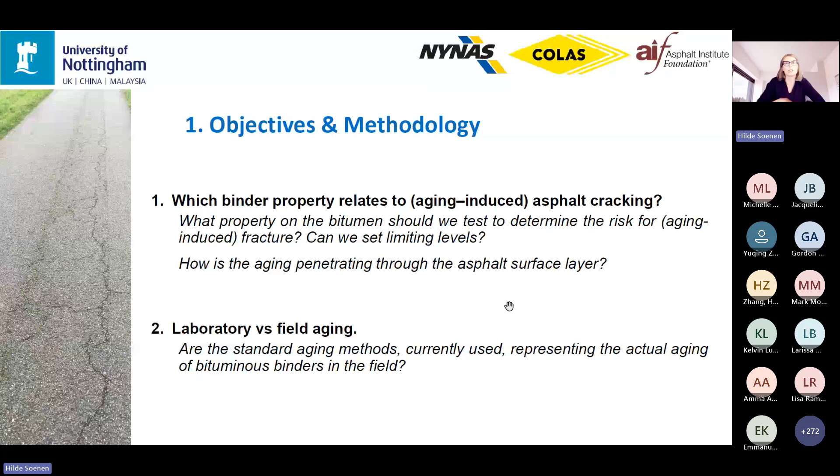Regarding the methodology, we first needed to select pavement sites, and we wanted pavements that have aging, so they needed to be at least 8 years old. We also wanted to have info on the road performance or road condition.

These two conditions are not easy, so it was not easy to select pavements, just to find pavements that were there where we could get cores from. Once we were able to get cores, we tried to take a large number of cores from the same spot, and all cores were taken from between the wheel paths because we were interested in the aging.

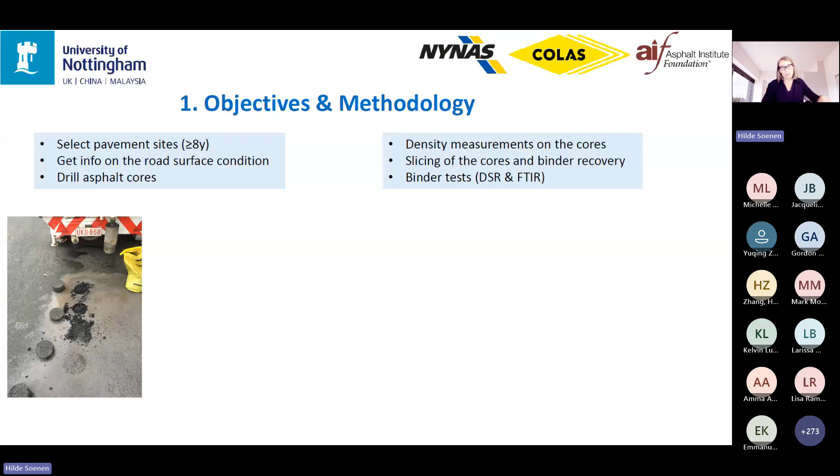Once we had enough cores, density measurements were conducted using nuclear density, which has the advantage that you get a density number every millimeter. After that, we sliced the cores.

In this case, you can see we used very thin slices. First, we put markings at 0.5 centimeter, then at 1 centimeter, and then every centimeter. And you see during the slicing, a lot of material gets lost.

So you end up with very thin slices, and we needed at least 5 cores to get enough material after the binder recovery so that we could still do some tests.

The main tests that we did were rheology and infrared spectroscopy. We also did some other tests, but those I will not discuss today. The whole procedure we followed has already been published, and at the end we will give some references where you can find these papers.

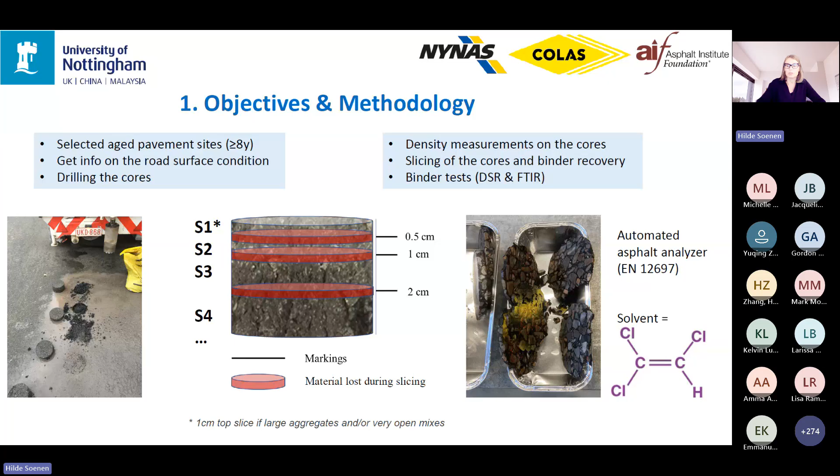Regarding the field sites we selected, in a project before this one we had already looked at a number of sites all over Europe, even one site in Morocco. During what we call the AIF project, we added 5 new sites to the project, as you can see here.

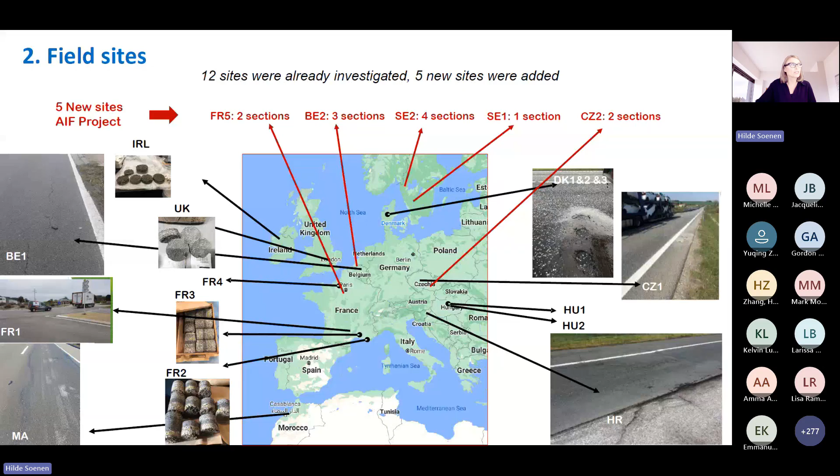I will not go into detail on all of these sites, but a few of them. For example, we had a site in France, from the highway between Paris and Lyon.

It's a very trafficked road, and there were two sections, one from 2004 and one from 2010, which you see here in the pictures. The one from 2004 was, in fact, end of life.

We also got the performance evaluation from the French road authorities, but they ended up with 3 levels, 3 severities. The older one was severity 3, and the pavement from 2010 was severity 2 in that system.

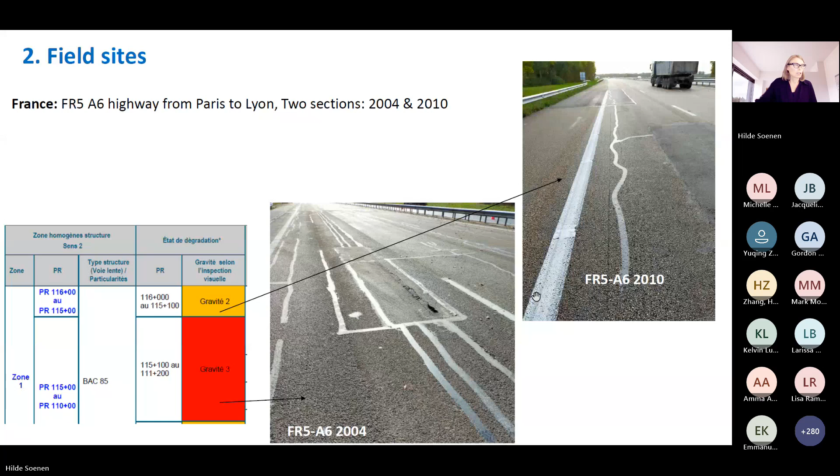Then we had a pavement in Belgium, a local road constructed in 2009. This was a test site for warm mix. We had a warm mix section based on zeolites, replacing part of the filler with a zeolite.

Then we had a hot mix reference section, and again a warm mix section based on a wax modified binder. Unfortunately, for this last section, we could not recover the wax modified binder, so it was not included.

But the zeolite section we could split into 2, because the first part was really suffering from raveling. You already see it has been repatched, so we took cores in between these maintenance areas.

Then we had a second part where we could also take cores, which had mainly raveling, as you can see here. The performance on this test track was assessed partly by visual inspection from the Belgian road authorities, but we also applied an automated scan, and here you see the mean texture depth, which was in the road center. So there was quite some raveling, which was not due to traffic.

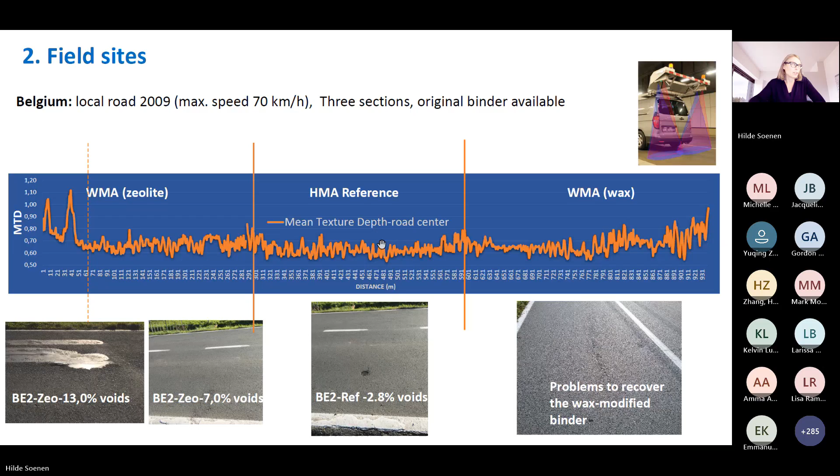And then I have a last section to show you, which was from the Czech Republic. It was again a local road, a binder from 2014.

In this case, we got an evaluation of the performance from a consultant, which divided it into 5 levels, as you can see here, depending on the amount of damage they observed. And this road got a severity 2.

So you see that even the road authorities apply different systems over Europe, and even consultants use visual classifications.

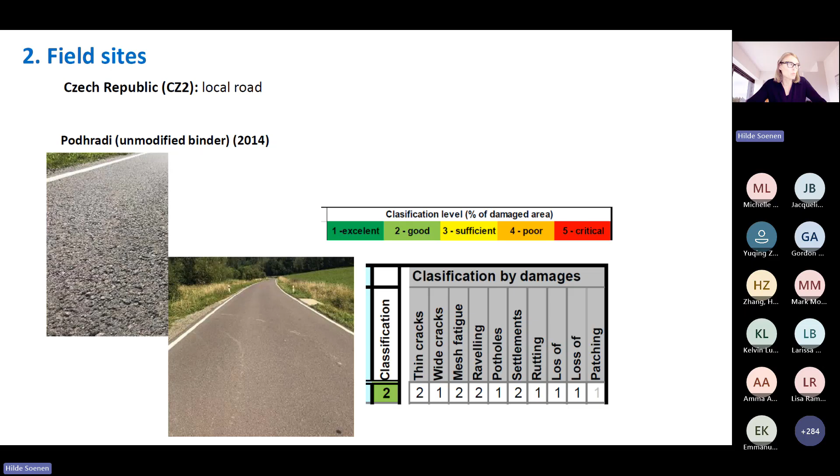Now I come to the first part to discuss some of the results.

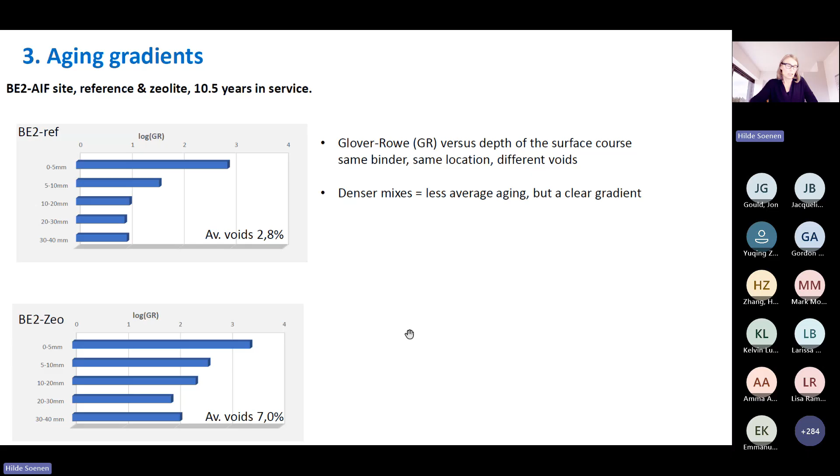Now I showed you log Glover-Rowe, but I can also show you the delta Tc level. It shows the same shape as the Glover-Rowe parameter. In this case, and we observed this very often, we saw a C shape in the properties versus pavement depth. And when we looked at the nuclear density, even there we saw a C shape. So probably this is related to each other.

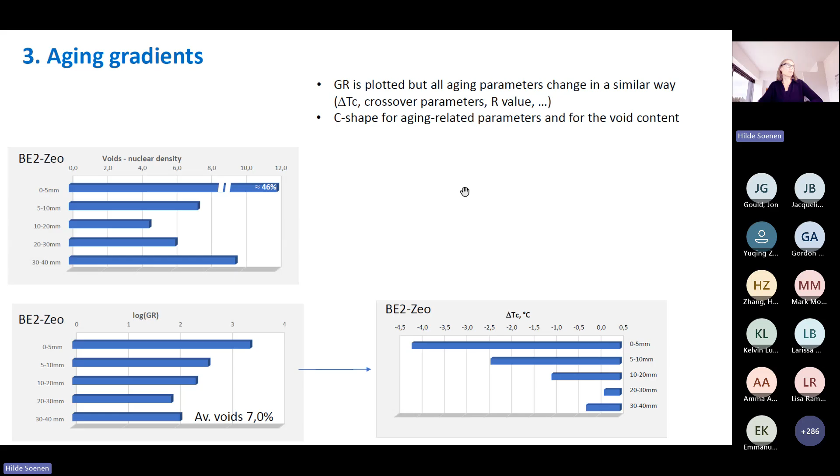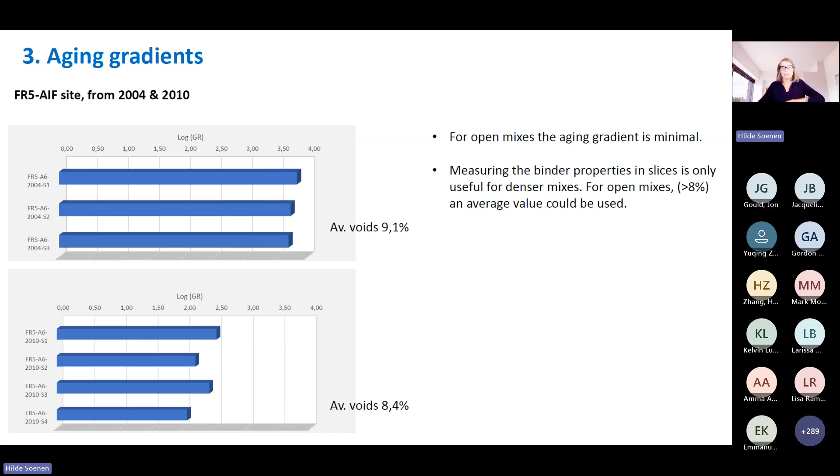If we then go to open mixes, the two from the French side, you see air voids of 9%. Now the pavement or surface layer is aged all over. In this case, 8.4, it still has a very minor gradient, but very little. So for the open mixes, in fact, slicing would not be needed because the layer is completely aged.

Then I come to the next topic, which was field aging versus long-term laboratory aging. This has already been presented at one of the STAR symposia, and it has also been published at the E&E conference, so you can find more information there. But I will just go through one of the highlights.

So we looked at stiffness data at different temperature regions for one section. For this Belgian section, we still had the original binder, and this is again the one with zeolite with 7% voids. You see the comparison at 50 degrees here. So the original, this is the standard aged, RTFOT and 1 times PAV. And then we did a continuous aging up to 4 times pressure aging vessel. You can see these three are the field aged slices, and the 4 times PAV comes close to what you see in field aging at 50 degrees.

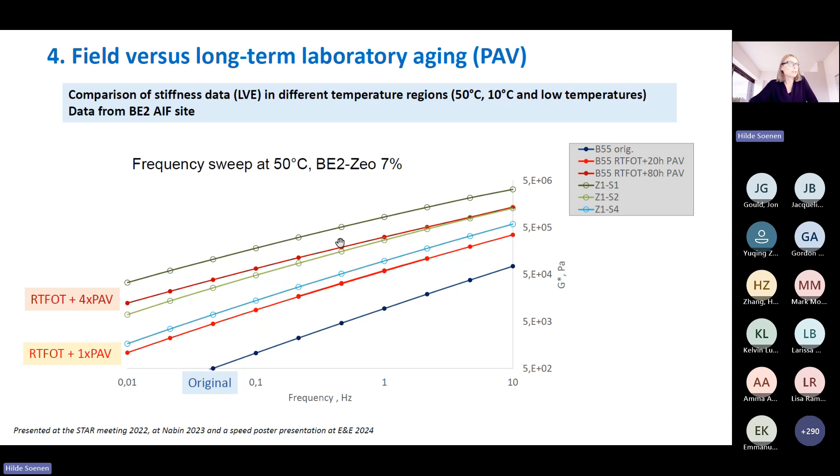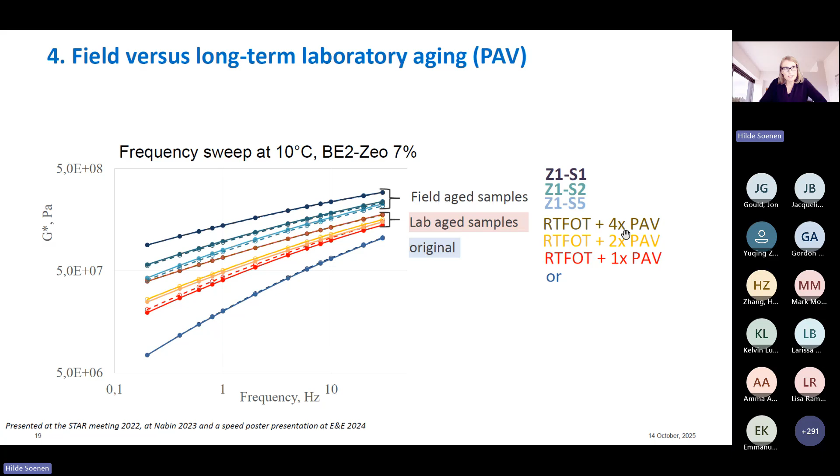But if we then go to lower temperatures, for example frequency sweeps at 10 degrees, same sample, same binders, you now see that the lab-aged samples are all below the field-aged samples. So lab aging, in this case, is not sufficient to simulate the stiffness that you see in the field.

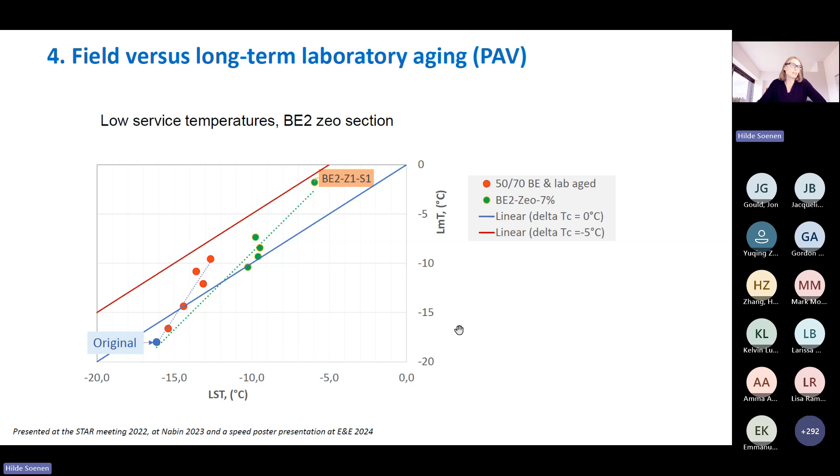And if you go to very low temperatures in the range of the bending beam, in this case this was measured with the 4 millimeter DSR, but all samples were measured in the same way, you see the lab aging is in this region and the field aging is here. So there is an even larger difference in the stiffness levels observed at very low temperatures compared to lab aging. If you had to age this to the same stiffness as the top slice, you would need many lab PAV aging cycles.

So I come now to the conclusions of this section. As mentioned, rheological properties trends are similar, but in field aging, stiffness increase is larger, especially at low and intermediate service temperatures, and these are just the temperatures where we get pavement cracking. We also did stress strain sweeps, which I do not show in this presentation, but we saw brittle fracture after field aging and ductile behavior after laboratory aging.

Regarding the chemical properties, we also noted some differences. There are much more sulfoxides in field-aged samples compared to the sulfoxides seen after the pressure aging vessel. And regarding the rankings, we had 2 binders for which we still had the original samples, but these two binders were from the same origin. So unfortunately, we cannot say whether the pressure aging vessel can still discriminate the binders regarding the ranking they would have in the field. So no conclusion on this last item.

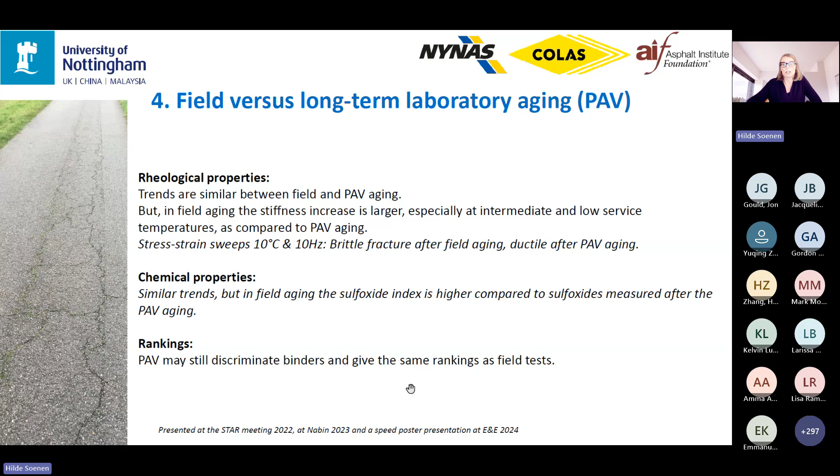And now I come to the last part of the presentation. So what did we do with the damage, or how do we compare the damage versus the binder parameters?

So we had a 0 with no damage, 1 was then very little and local, 2 is more but still local. 3, you have a change from local to connected levels, and 4 was end of life.

And in this evaluation, we considered all types of cracks, except if we knew that there were reflective cracks, or if there was a base layer or support issue. So because of that, one section was removed.

And for this Belgian section, we also included raveling as a damage parameter.

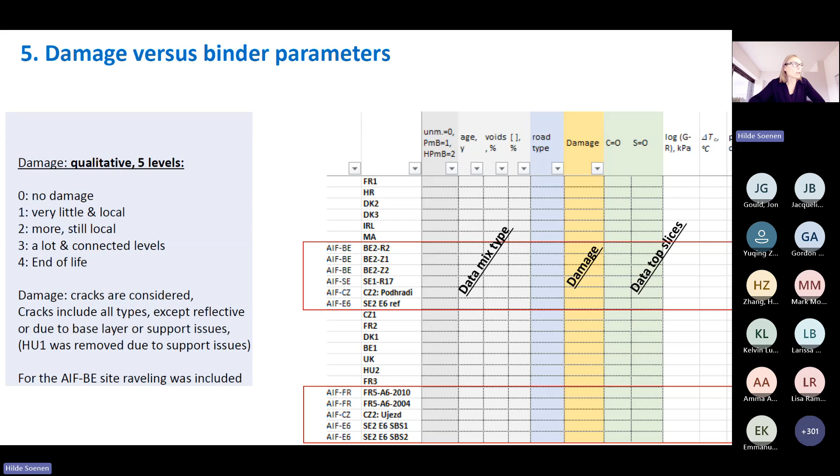So in this slide, I now look at the AIF sites we investigated, only the top slices, data from the top slices, and we look at the Glover-Rowe parameter. So in total, we have 11 sections, and they are plotted in a black diagram. So in our study, we used the Glover-Rowe determined at 15 degrees and at the very low frequency level.

And you can see the 0 is the lowest and the 2 with a number 4. So these numbers are damage levels. The 2 with a number 4 are on a high side.

You could argue that this 3 could be an exception and this 1 could be an exception, and also the 2. So I looked a bit further which ones these are, and you can see it's a highway and a highway, and this is a local road. So probably the traffic, as we expect, will play a role as well.

And in this graph, you see the damage versus the logarithmic of the Glover-Rowe. And the correlation is 0.59, which means, in fact, that the variation in the damage is for 59% determined by the logarithmic of the Glover-Rowe, which is a lot if you consider all the variations between the sections.

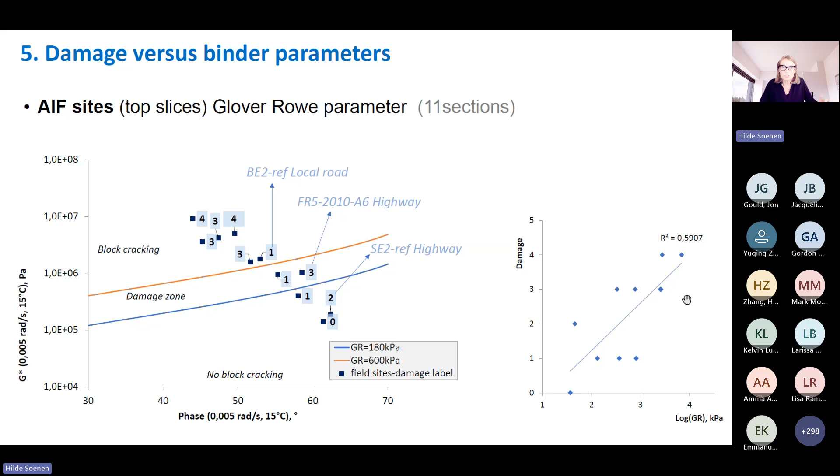So then we did the same thing, but for delta TC. And this is now plotted in a diagram showing the limiting M temperature versus the limiting S temperature.

And here you see the number 4, for example, once it is above the critical line and once it is below, there is one above the critical line and some are below. Here there is a lot above. So if you now plot damage versus delta TC, you see that there is no correlation that we could find.

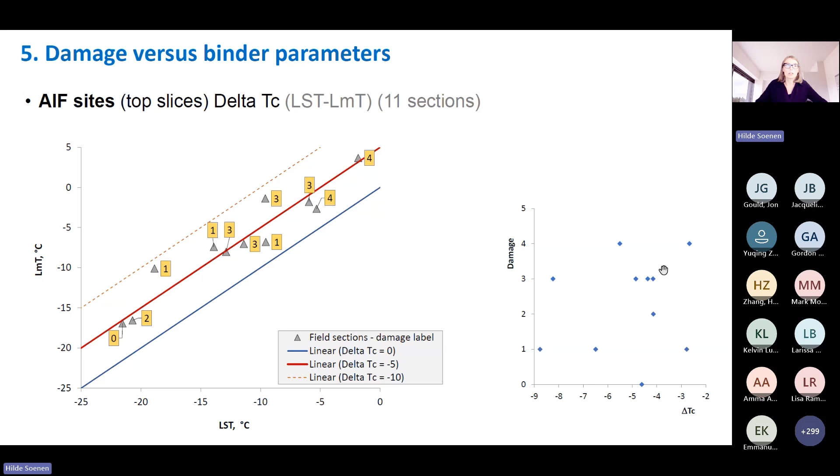The next graph here is now all the sections, the 24 sections. So you see again, there is quite a correlation.

There is one exception here, which is if you do it statistically, seen as an outlier, but in fact, this is an airport pavement and it is a highly modified binder. So probably that is the reason why it is an outlier.

So if you look in the graph damage versus logarithmic Glover-Rowe, it is the point here, which is in fact the point which makes the correlation a bit worse. But still we are at about 50%, which is a lot if you consider all the variations here.

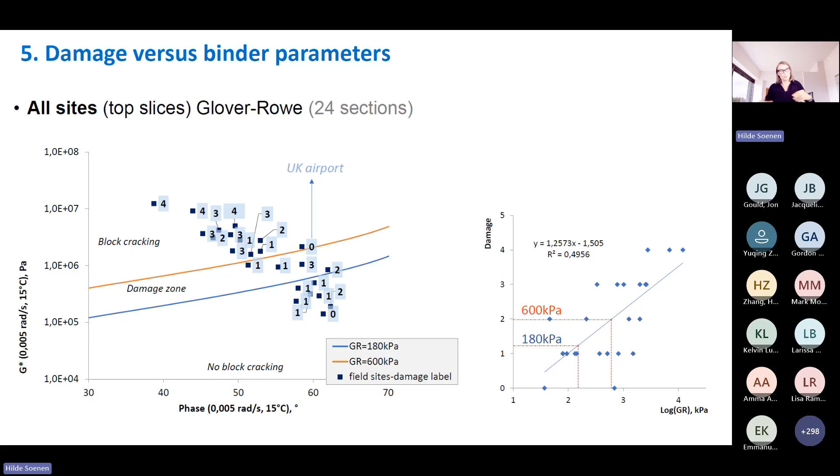And we also see that the proposed limiting levels, so the warning of 180 kilopascal for the Glover-Rowe, ends up close to a level 1 in the damage, and the 600 is the change from 2 to 3, which is, in fact, where you have already some damage and move to the connected levels.

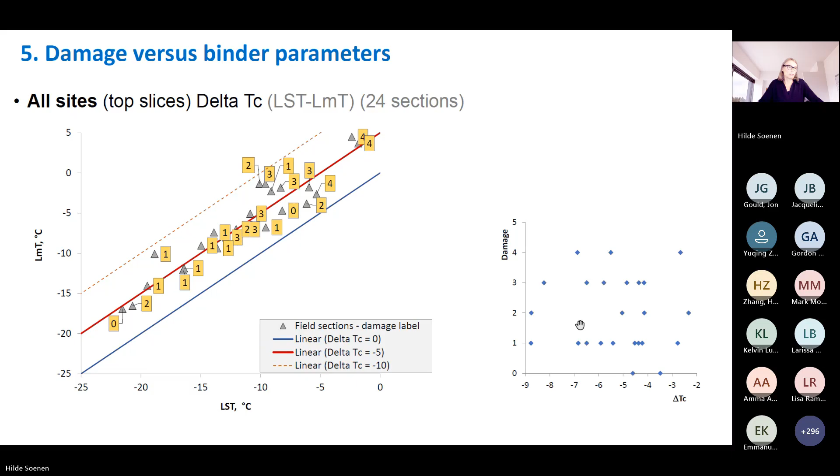We did the same thing for delta TC with all the sections now, and again, there is no correlation that one could see here.

And this is the last slide on this. We also did a graph only using the highways, so just to separate a bit the traffic. And now you see it's an even better correlation. One reason is, of course, that this airport pavement, which was an outlier, is now gone. So that's also playing a role.

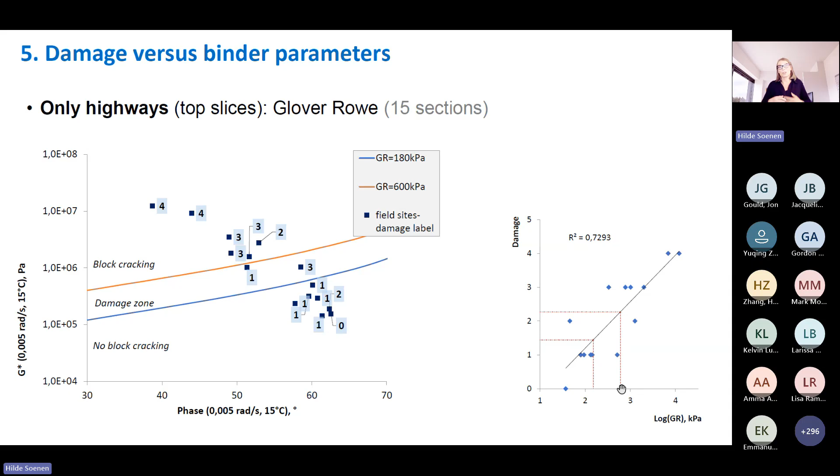What else did we do? Since we had so many sections, we were able to do a significance analysis. So assuming a null hypothesis that there is no relation, and then you check what is the probability of having this null hypothesis. And the lower this probability is, the more significant your correlation is.

So in this case, it's very low, so we can reject the null hypothesis and say that there is a real effect here. So almost 50% of the variance in damage is explained by the Glover-Rowe.

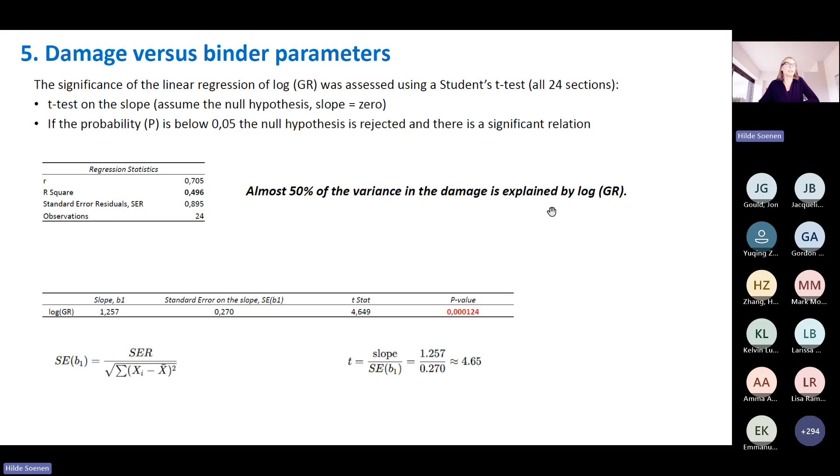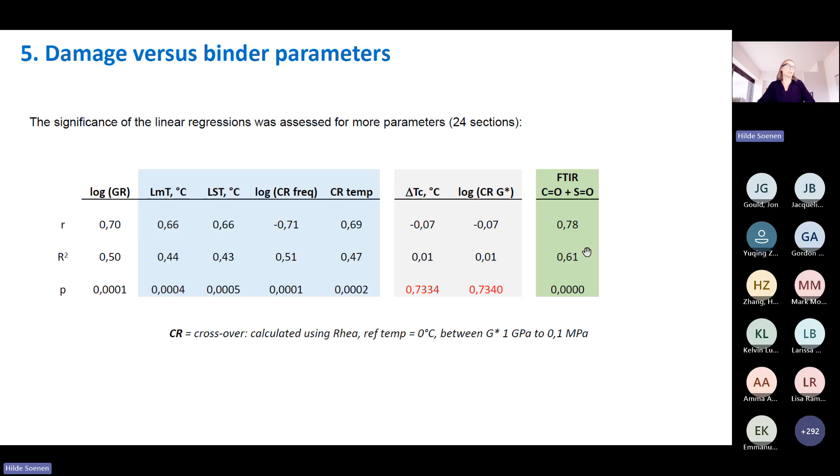We did the same thing for some more parameters, using the limiting M temperature, the limiting stiffness temperature, the crossover frequency and the crossover temperature. They all have a very similar coefficient of determination, and they are significant. On the other hand, delta TC or the log crossover stiffness did not show a correlation. Finally, from FTIR, if we took the sum of carbonyls and sulfoxides, we found the best correlation, and also very significant.

As a conclusion, our qualitative damage levels indicate a significant trend with the Glover-Rowe parameter, while no relation was seen with delta TC, and the proposed cracking limits fit the observations.

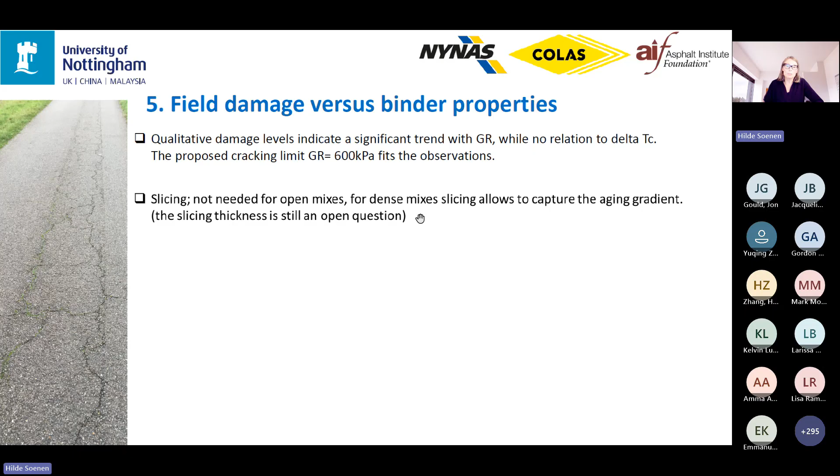Slicing would not be needed for open mixes, but for dense mixes, slicing allows you to capture the gradient, though your value will also depend on your slice thickness. So that leaves an open question of whether you really need to use this 0.5 centimeter, because that's very thin.

Then some other observations: we still use the qualitative damage level because there was no unified method used by the road authorities. And even if you have the damage, it's not always sure what the reasons are or where it comes from. Very often you can determine it from the crack shape, but not always. We also noted large differences in compaction for the same site.

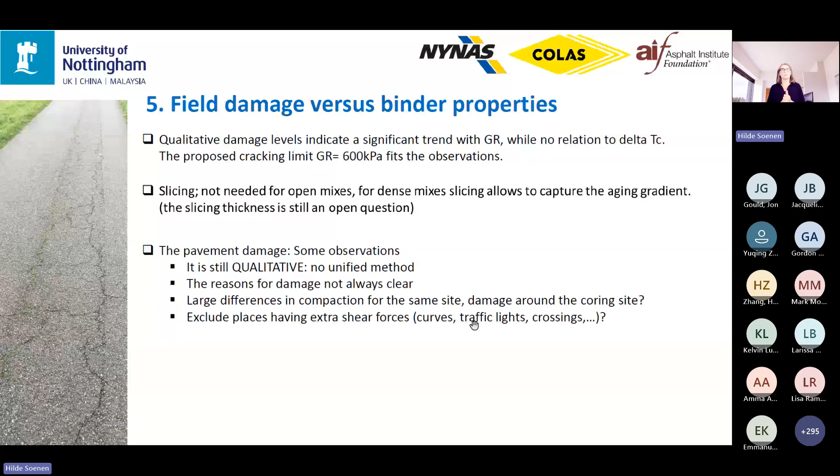Therefore, we focused a little more on the damage around the coring site, and we also excluded places having high shear forces like curves, traffic lights, and crossings. So we looked more at the straight parts of the sections.

And with this, we've come to the end of my presentation. So now I will hand over to Hanyu.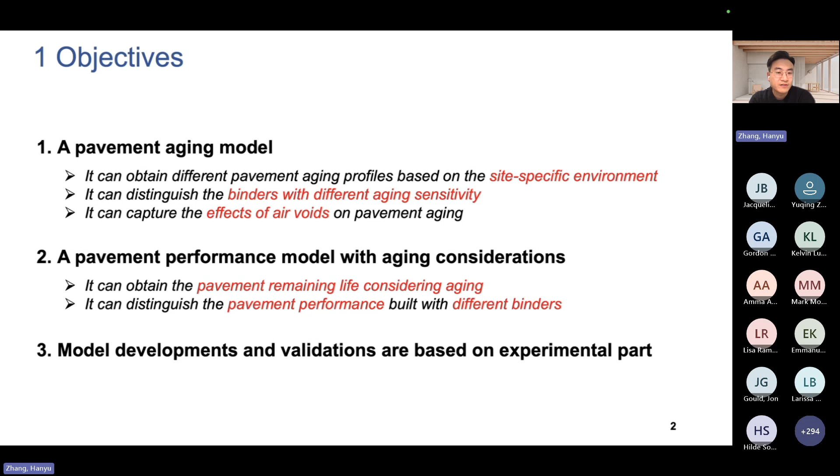I would like to emphasize here that our experimental part and the modeling part are not separate works, because all the model developments and validations are based on the experimental part.

So for the modeling framework, I believe most of you are very familiar with aging. We need to understand the mechanisms for asphalt aging in the pavement. It is a very typical diffusion and reaction process, which means the pavement temperature must suffice to activate this oxidation process. That refers to the first physical process here: heat transfer along the pavement depth.

Now we have the temperature. We also need a sufficient amount of oxygen for the oxidation. That refers to the second physical process here, which is oxygen diffusion. Once the temperature and oxygen are ready, the oxidative reaction can happen. That is the third physical process here.

So to sum up, pavement aging is a multi-physics phenomenon that is highly associated with temperature and the oxygen amount.

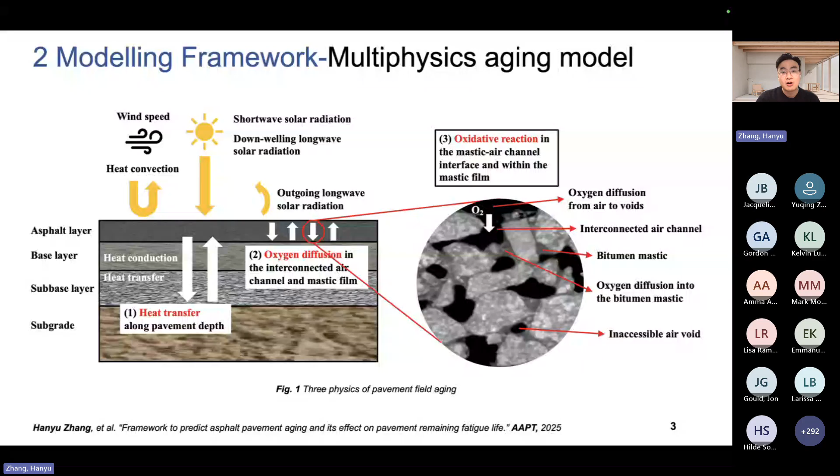After we understand the aging mechanisms, we need to formulate a series of equations so that we can model pavement aging using numerical methods. The credit here goes to Professor Charles Glover and his team at Texas A&M University for developing those coupling equations. For our project, we developed our aging model based on their work.

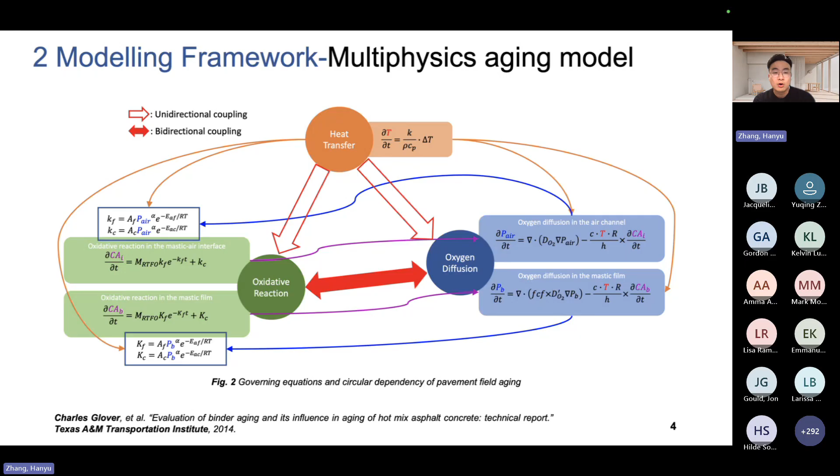I would like to note that in our project we use carbonyl. We select the carbonyl index as the aging parameter because we think it's still the most appropriate indicator for quantifying aging in terms of the current mainstream binders.

Now that we are able to model aging, we need to figure out a way to couple aging with our mechanical models. For our project, I developed this time, temperature, and aging shift model based on the free volume theory. This theory tells us that external factors like temperature, aging, and solvent concentration all change the molecular volume system and molecular motions, which changes macroscopic material properties like viscosity and modulus. By using this time, temperature, and aging shift model, we can simultaneously consider the effects of temperature and aging on asphalt material modulus change when doing the mechanical modeling.

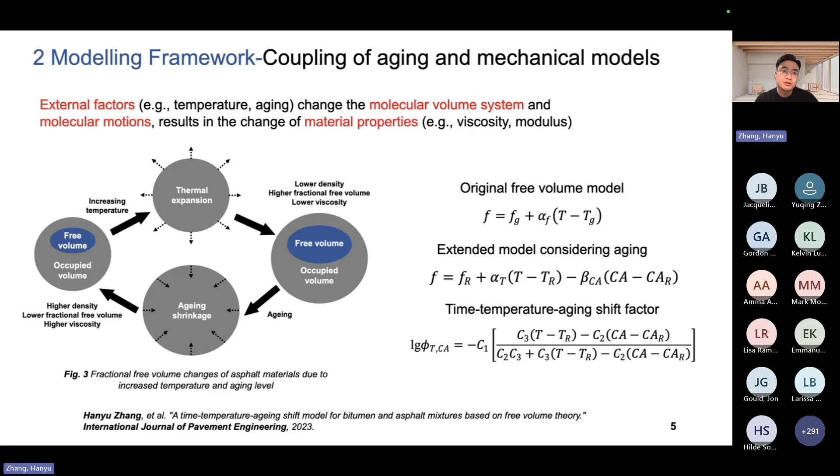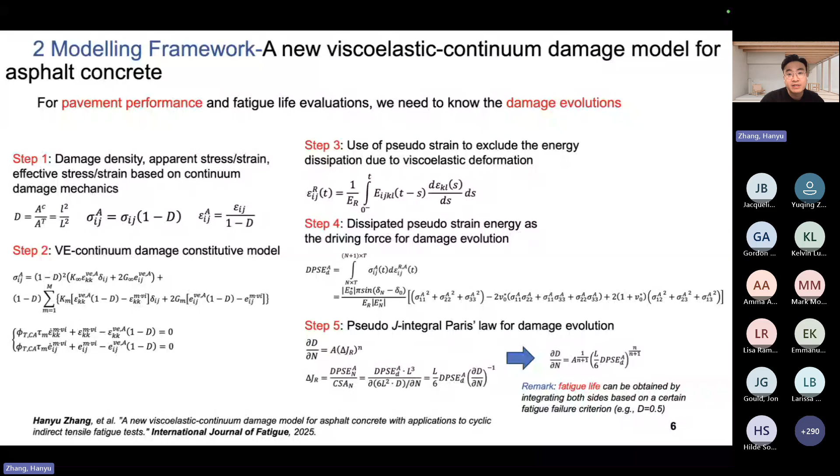Now we have the pavement aging model, and a method to couple aging with mechanical analysis, but it's still not enough because we want to know the pavement damage behaviors under the coupling effects of aging and vehicle loads. So I developed this viscoelastic continuum damage model for asphalt concrete based on Professor Schapery's work energy concept. Using this damage model, we can predict the pavement's remaining fatigue life based on current aging conditions and stress state.

This slide shows the workflow of these different models. First, we conducted the pavement aging modeling, and output functions of temperature and carbonyl index, which are related to time as evolution functions. Then we input those functions into the shift factor. Next, we input this time, temperature, and aging shift factor into the viscoelastic continuum damage model, so we can obtain the pavement damage conditions when considering aging effects.

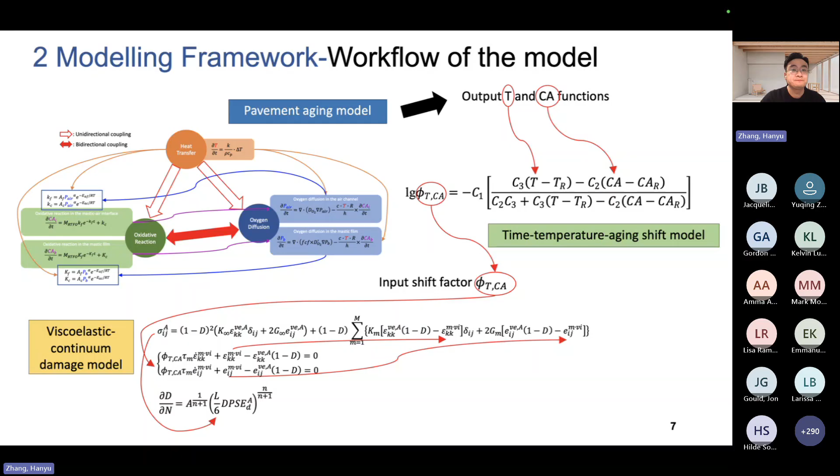So I'm going to introduce the model validations. We spent a lot of time developing the models and also a lot of time validating them, because the model predictions or applications wouldn't be reliable without enough validation. Here I selected four different road sections in our project, which have enough testing results and measurements for validating different parts of our models.

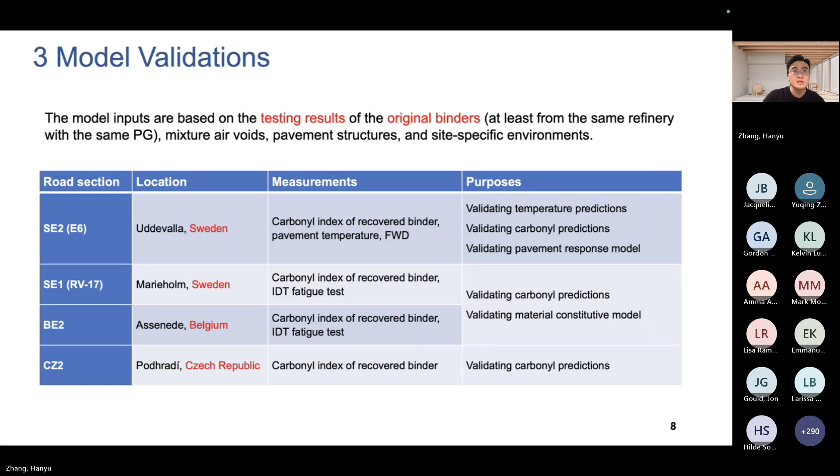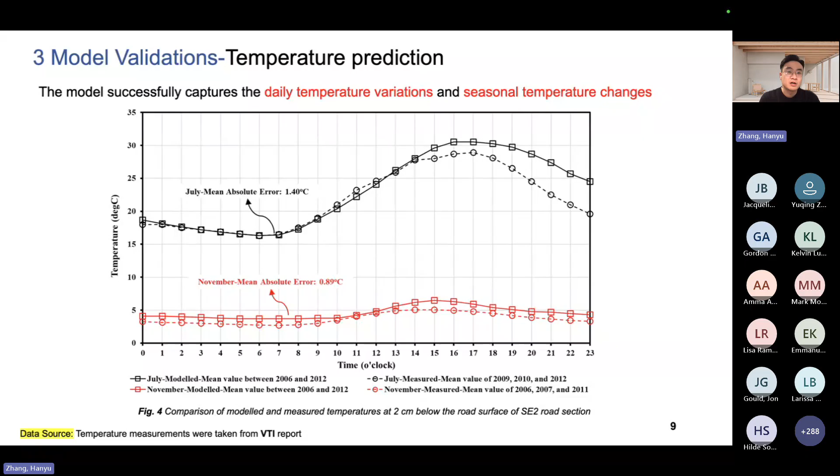This slide shows the comparison of the modeled and measured temperatures in both summertime and wintertime at 2 centimeters below the road surface of one road section. We see the model can capture the daily temperature variations and the seasonal temperature changes, so I would say the model is valid in terms of predicting pavement temperatures.

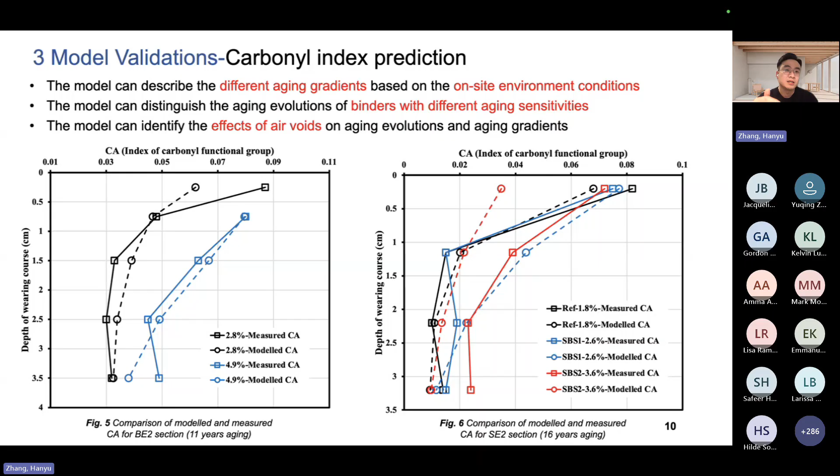This slide shows another two comparisons for another two road sections for the carbonyl predictions.

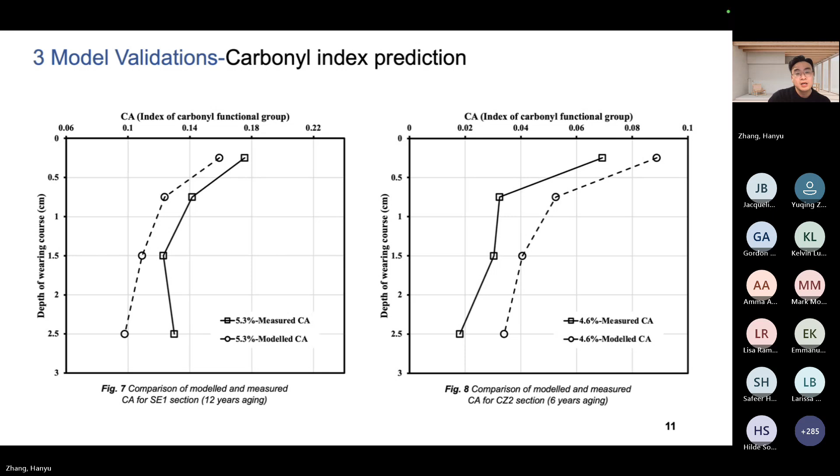So we have validated the aging models in the previous slides. In this slide, I'm going to show the validations in terms of the material constitutive model, that is, the viscoelastic continuum damage model.

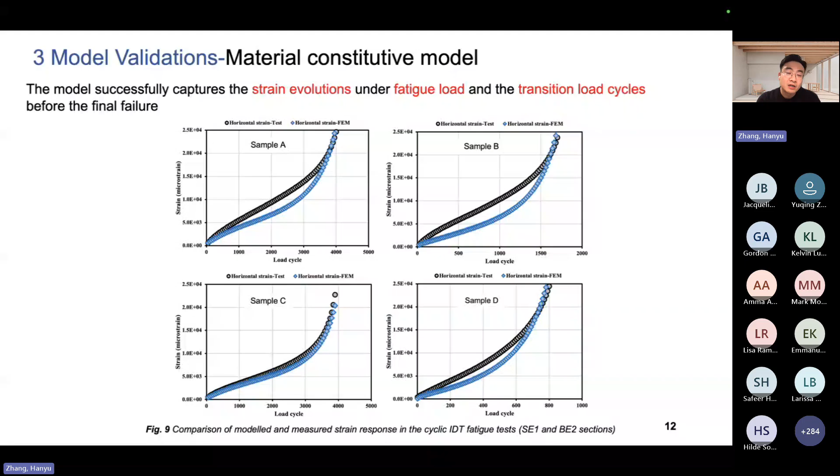This figure shows the comparison of the modeled and measured strain response in a cyclic indirect tensile fatigue test for the field cores. We see that the model can capture the strain evolutions over the fatigue load and transition load cycles before the final failure. So the model is valid in terms of describing the asphalt fatigue damage behaviors.

The final part of model validations is for the pavement response model. Here I use the FWD measurements and their back-calculated strain as the benchmark. We see that the model can capture the pavement response under the FWD load, and it also captures the response evolutions with aging. As expected, and shown in the right figure, with aging the strain at the bottom of the asphalt layer decreases because we have a stiffer asphalt layer after aging.

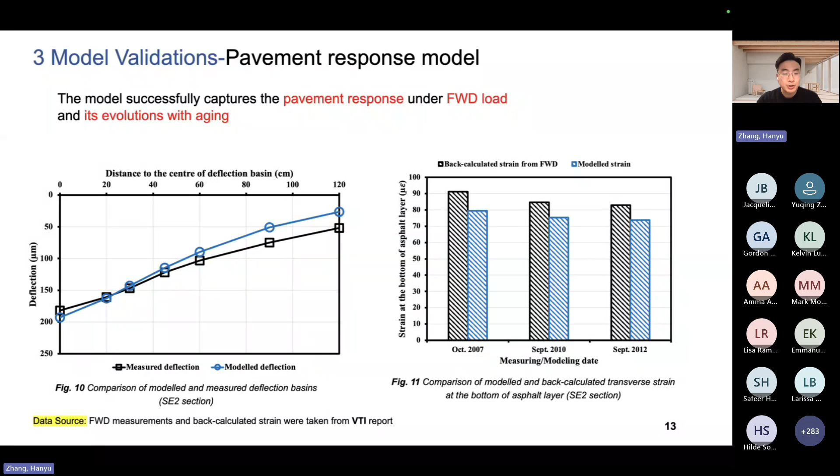After completing all the different parts of model validations, now we are confident to do some predictions, to have some applications of our models.

The first model application is the fatigue life prediction considering aging. This figure shows the Mises stress distributions at different aging times. What we can see here is that with aging, the high stress regions move from the bottom of the asphalt layer to the road surface. So it potentially changes the cracking mode from bottom-up to top-down and may further contribute to raveling. This finding is also consistent with one of the NCHRP projects regarding top-down cracking that was led by Texas A&M University.

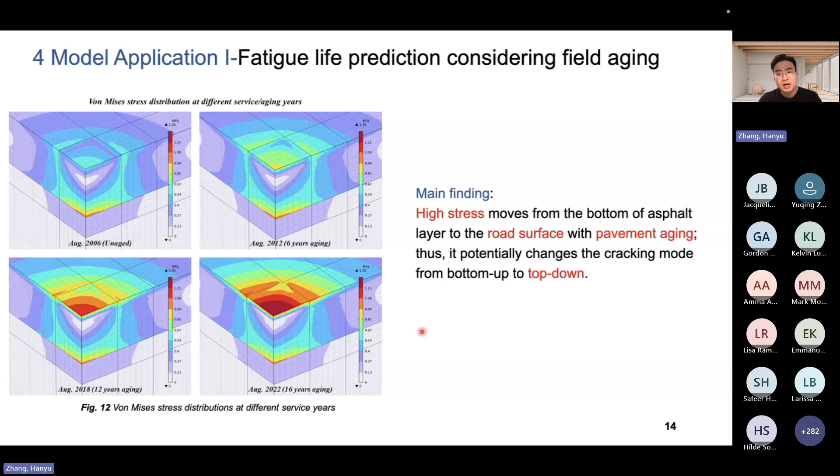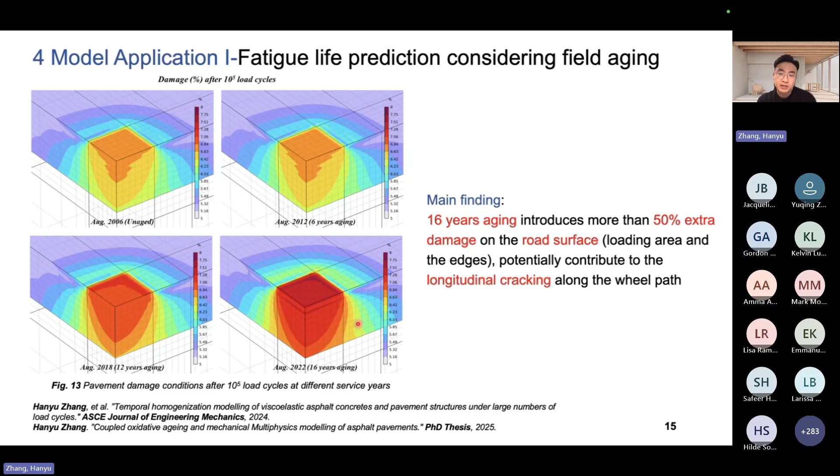In the previous slide, we already see the aging effects when we use a stress indicator. This figure shows the pavement damage conditions after 100,000 load cycles at different aging times. The major finding here is that, for this road section, 16 years of aging would introduce more than 50% extra damage on the road surface, both within the loading area and at the edge of the loading area. So I think it potentially contributes to longitudinal cracking along the wheel path.

Now we understand that aging has a substantial effect on pavement performance, but we still need a quantitative indicator to show the aging effects. So the figure on the left shows the remaining fatigue life predictions at different aging years. The right figure shows the comparison of the minimum remaining fatigue life predictions with and without aging considerations. What we see here is that, in this case, 16 years of aging would shorten the pavement remaining fatigue life by up to 1.6 years, when we only consider the effects of aging on pavement modulus change and the modulus gradient.

What we didn't consider here is the material degradation in terms of damage tolerance with aging. So imagine if we include this part of the effects in our modeling, I believe we'll have much more difference, more than 1.6 years, I believe.

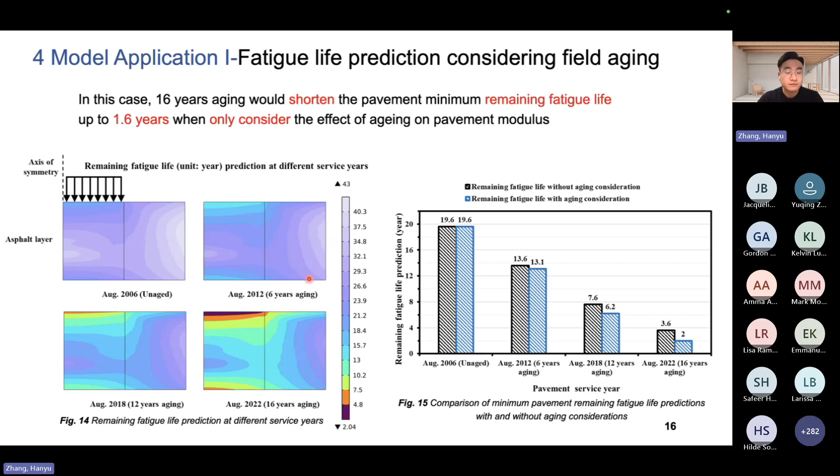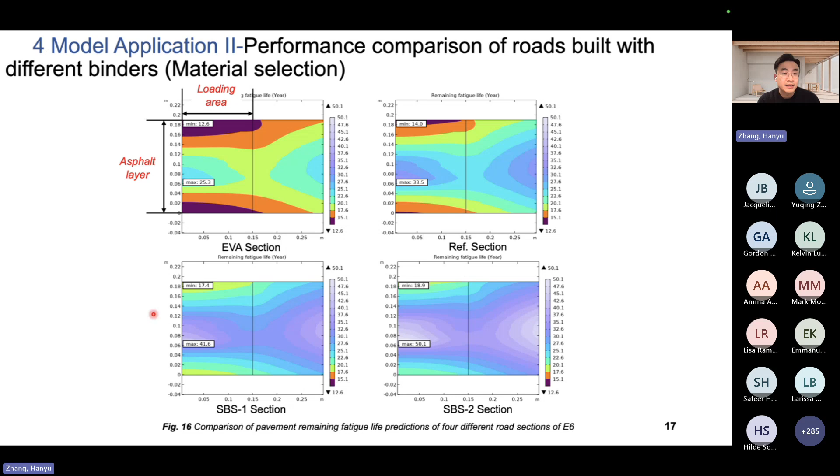Now, the second part of model application is the performance comparison of roads built with different binders. That's mainly for material selection. This figure shows a comparison of pavement remaining fatigue life predictions of 4 trial sections in the same road sections in Sweden. We use different binders, but they are used in the same location. So what we see here is that the two polymer modifying binder sections demonstrate outstanding performance when we compare to the reference and EVA sections.

So this means if we use the work, we can have some prior understandings. We can have some indications for the pavement performance. If we want to use, for example, a new binder or a polymer modifying binder or other materials, before doing the construction, we can do the modeling, so we can have much more information before we make the decision.

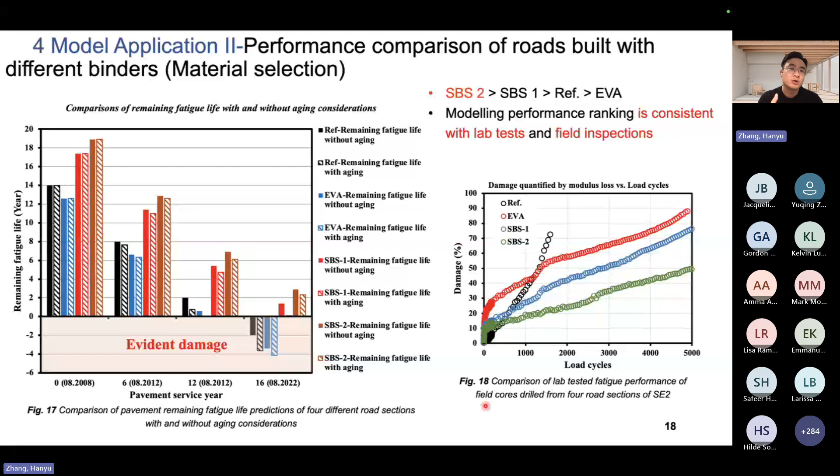So here's a summary for the modeling part. First, aging gradient, like we observed in the field, is as evident as temperature gradient, and we should consider it in pavement mechanical analysis and performance predictions. Second, carbonyl index is a fundamental parameter to quantify aging evolution and aging gradients in the pavement structure, and it can replace the empirical modulus-based aging characterizations.

Maybe more than 20 years ago, when we developed the Global Aging System, developed by Professor Witczak, we used viscosity. Then in one of the NCHRP projects led by NC State University, we used modulus. Now in our project, we decided to use carbonyl index because it's a fundamental property of the mainstream binders.

Our model has been validated at different scales, in terms of material scale and structural scale, and using different measurements. We use the temperature, we use the carbonyl, we use the FWD response to validate the model before we do any predictions and applications.

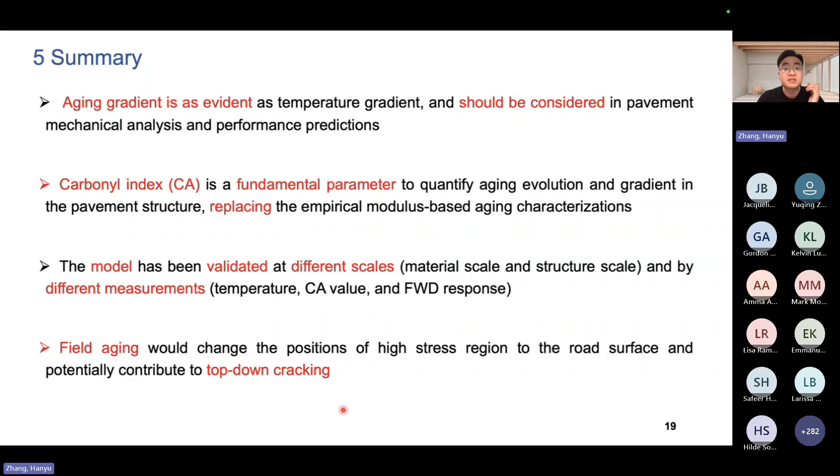According to our findings, field aging will change the position of the high stress region, or the most dangerous position, from the bottom to the road surface. So it potentially contributes to top-down cracking.

In our case, 16 years of field aging would introduce more than 50% extra damage on the road surface, mainly localized at the edge of the loading area, which potentially leads to longitudinal cracking.

In our case study, field aging would shorten the pavement's remaining fatigue life by up to 1.6 years, when we only consider the effects of aging on modulus change and the modulus gradient. If we consider more, including material degradation in terms of damage tolerance, we'll see much more difference for the aging effects.

So our model has two major applications. The first is to predict pavement performance considering aging effects. I think this is mainly for design and analysis.

The second application is to compare the performance of roads built with different binders. As mentioned in the previous slides, different binders have different performance according to lab testing results, but we're not sure how they'll behave in the field. So we can do the modeling and get some prior understanding before we actually use the materials.

The next point is that our model can consider the effects of maintenance and rehabilitation when we try to extend the remaining service life of existing pavements.

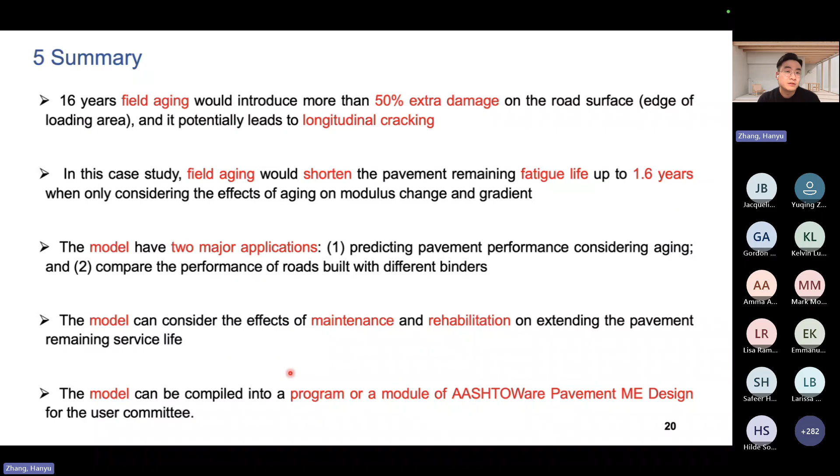Finally, the model can be compiled into a program or module of the AASHTOWare Pavement ME design, so it would be very user-friendly for different practitioners.

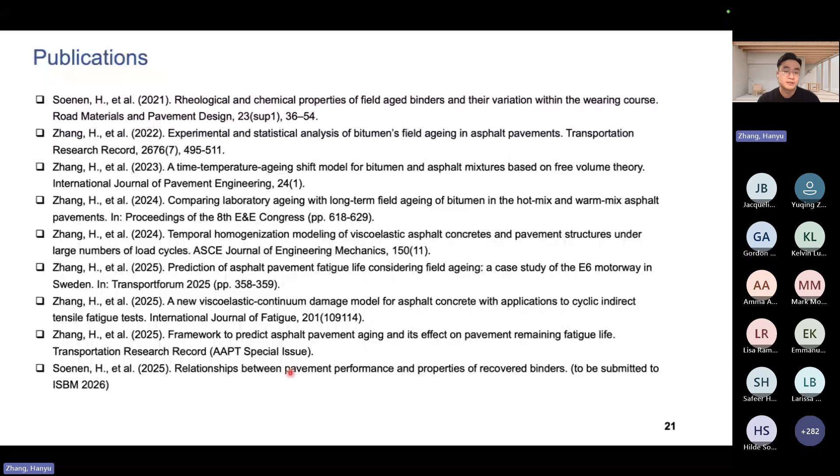This is a list of our publications produced from this project. Many details we can't present here today, but you can find them in these publications. I think that's pretty much my presentation today. Thank you, and please feel free to ask if you have any questions.